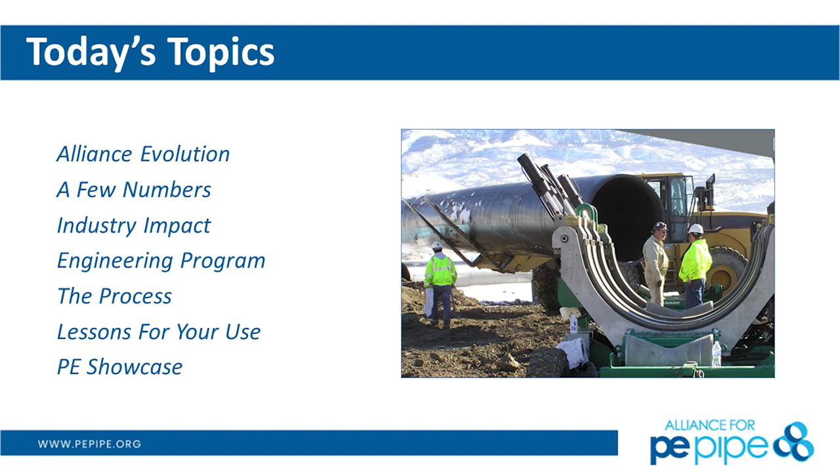And we have a board of directors that guide this organization. And who's in here besides Dave? Dave is now our board chair. I think he's the only one, right? So this is the group of people that my team reports to. We're very thankful for their service. We just lost Performance Pipe from the board. But yes, I'm disappointed, but they've been around since the beginning. They were in the room with Dave Hughes. And that's a lot of years of support. We can't do it without the support of these companies and their financial contributions. So it's a big deal.

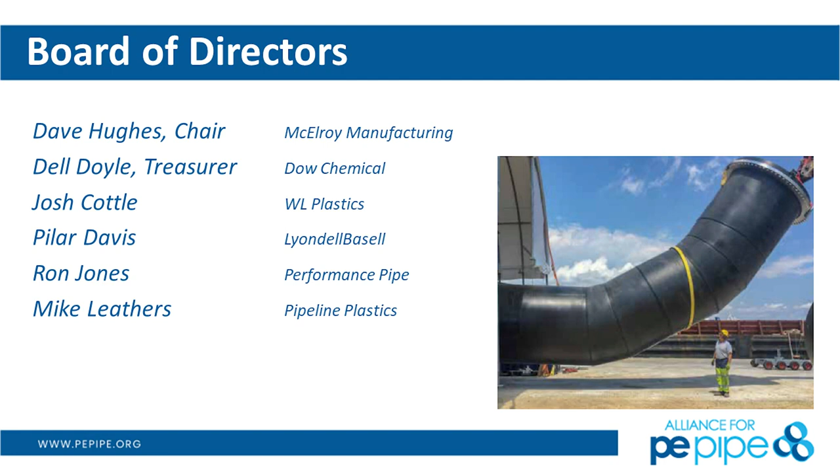So what do we do? We have a budget of about $1.4 million. We build cases. So we have over 425 cases. So if you're in Oklahoma and you want to know who in your peer group, if you're the utility, who in your peer group is doing it, you can go online and you can find out. We have a certified professional program. So we take a group of between 4 and 6 people a year and we educate them to a higher level so they can do their jobs better. This is a kind of an intense study program for a select group of people that want to participate.

We now have 45,000 names as of yesterday in our contact file. So these are consulting civil engineers and people in municipal government that operate water systems. This is a high maintenance thing. Who keeps a list? Who uses constant contact? How brutal are they? Every time you send out an email, they send you all the rejects, and if you don't take those off, then they won't let you start sending emails again. So this is something that we maintain on a regular basis.

We've got the engineering program, we've got cases and leads. Dan, what is a case and what is a lead?

Cases are general inquiries. If someone's having issues designing a pressure test, or looking at initiatives non-specific to an exact project, they want to know how to do something, but they're not actually tied to a project, or looking at a specific installation method down in the future. So it's a general inquiry for the most part.

The leads are important to what we're doing, so we share leads with the distributor community as we facilitate projects. We've got the podcast program.

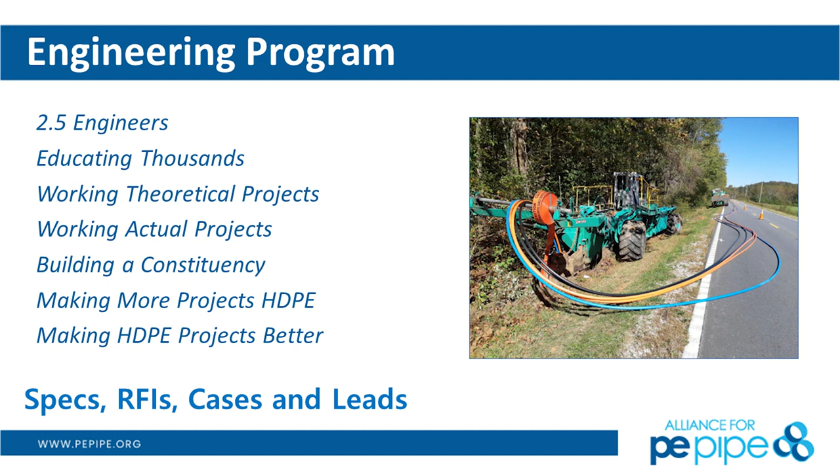I'm not picking on it, but I'm just saying Tulsa's a perfect example of what we see and why the Alliance is around, because it takes so long to get through people and get to the key stakeholder that's making the decision, or through the committee. And when you're at a committee level, you can add 2 or 3 years for sure, right? So we've built up our ability to communicate at that level with the various utilities.

So I call this the key metric table. Webinars, so we did 34 in the first year of COVID. That makes sense because we weren't able to go on the road, right? And now we're parked at about 15 webinars a year. And of those 15 that we're doing this year, 10 of them are new content and 5 of them are recycled content.

Road shows, we'll do 25. We've already done 25 this year. We'll end up about 28.

Trade shows, think AWWA or the Great Texas Water Show. This year we will do pipe bursting in our booth in 4 of those 6 shows. So those are big booths. That's a big footprint, very expensive.

And for years, I did the AWWA show, and I tried to be a speaker there, because I do speak a lot for this industry, right? And they always say no, no. Why? Well, it's because AWWA is run by the ductile iron people, and they don't want to hear about plastic. That's right. So now I break their pipe in my booth. And it really pisses them off.

So that's been a successful thing for us. We do it now at ASCE, which is a civil engineering show, and we've done it for the last couple of years, Bob, at APWA, right? APWA and always at AWWA, and it's always a huge hit. We get hundreds of people coming into our booth. Makes a lot of noise, and it's really cool to see. Yeah, breaking pipe is a fun thing to do.

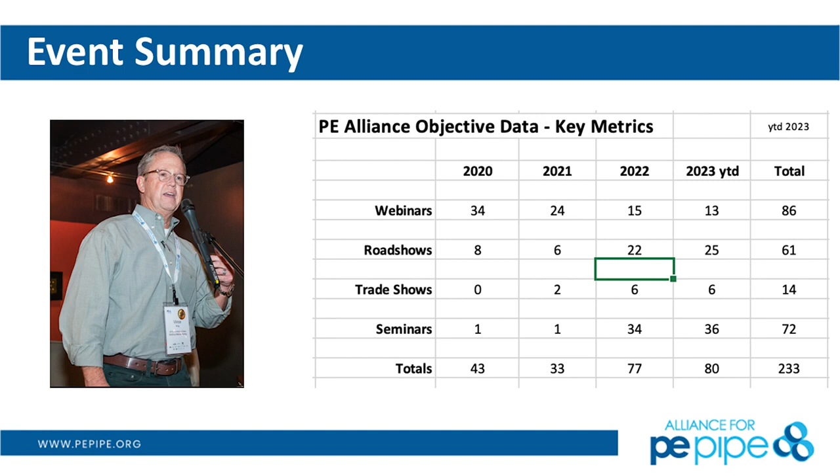We get around, and I've kept track of the industry members that participate with us. It's one thing to have the Alliance go, but we always partner with others. We typically, in any one year, will have anywhere between 80 and 100 of you all helping us produce all these events. So it's not just us - we might show up with the gear, but you guys are helping us produce the event.

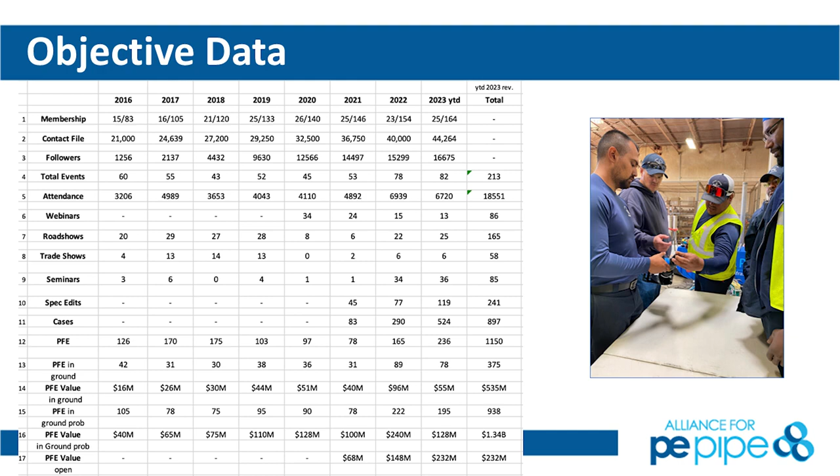And looking at our average attendance, pre-COVID we were 45, and now we're stuck the last 3 years at this sub 30 number. You might say, well, your webinars seem to be really, they're 10x more well attended than the road shows. But we really believe that the road shows remain critical to our mission.

And I think the reason the webinars are so successful is because we were originally known as this group that traveled the country with a truck with 10,000 pounds of gear on it, and we were credible, instead of just hiding behind a screen and people not really knowing who you are and what you do. So we have a presence, we are known, and just look at the average attendance.

We continue to get tremendous positive feedback on our webinars because of the content we provide. And let's go a little bit deeper into this - any questions on any of this?

Let's go a little deeper into some of this. Dave and his colleagues and Mike James, they've kind of pushed us into using a CRM. Who uses a CRM? I mean, how much do you hate that thing?

I tried it for a year and I gave up on it. Then when we started the engineering program, they said, well, here's the money, but you can't use it unless you have a CRM. I'm like, okay. Now I love this thing. As long as you take the time to love it, it'll love you back.

And it does. So this is cases from last week. We've had 524 cases this year. So that's an RFI or a spec. Example, hey, a hydrostatic test, how does it work? Closed means we've handled it. This guy had a question on burial depth, questions on electrofusion.

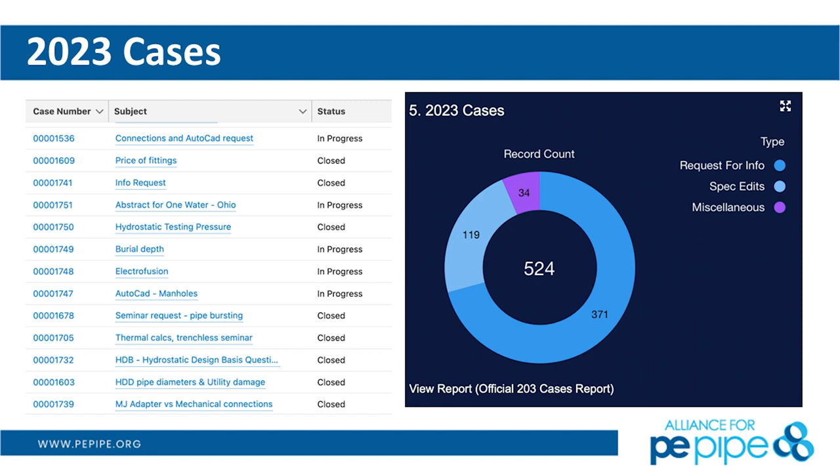You get the idea of what a case is. On PFEs, so these are the leads, 236 so far year to date. These are projects that actually have a budget associated with them. And this is a specific question - could be drawing set, questions about contractors, all kinds of stuff. But 70 of them are dead, 220 of them are open. Dan, what's the value of all the open PFEs approximately? It was 232 as of the end of Q2, so probably 250 million, roughly 250 million. Yeah, so we're averaging just under $1 million per PFE in polyethylene value.

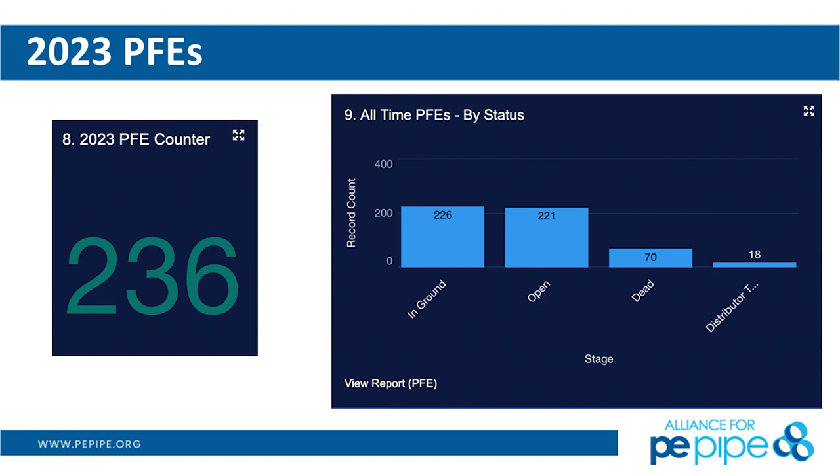So part of what I promised to do today was also to give some examples of some of the projects we worked on. Seattle Public Utilities, known as SPU, is a great example of a utility that McElroy was intimately involved with. I had an old 28 machine and an old 26, and Seattle invited me to come out and do a seminar with them. When I was done with the seminar, with the graciousness of McElroy, I'd left them a 28 and a 26, which they've had now for quite some time, and now we just moved the 26 machine to Woodinville. But anyway, they hadn't done any polyethylene except for a couple drills they had to do.

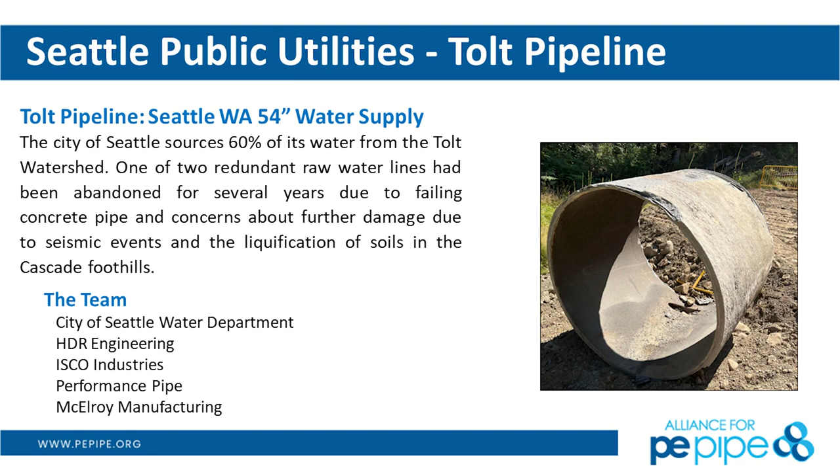Seattle has now done 4 water mains in hilly neighborhoods in downtown Seattle. And this Tolt pipeline is a project that Drew Mueller, who used to work for me, managed for ISCO, where the Tolt is a water body or a region where they take like 60% of Seattle's water from that part of the mountains. This was a failed concrete line that we ended up slip lining with some performance pipe, large diameter polyethylene. This project went in the ground last fall, so it's just about a year old.

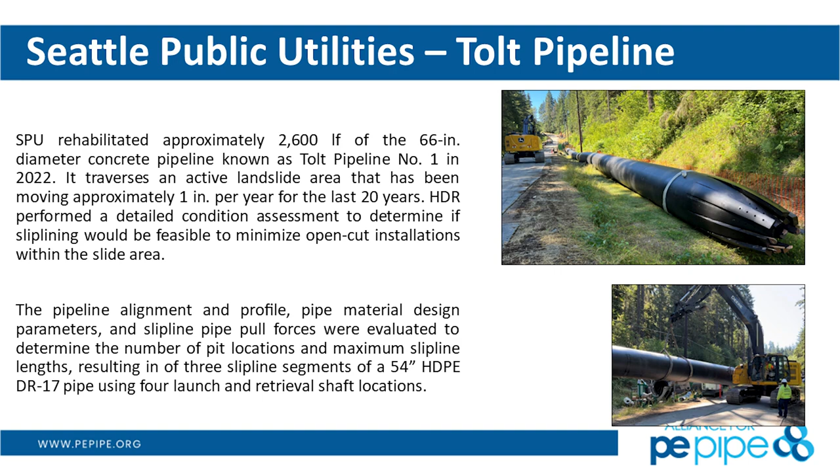So here's a situation where we taught the engineers for 2 or 3 years, didn't take any action. Then they did these 4 projects with water mains in downtown, and then they did the big one. They just got an award from the Alliance in the showcase of last year. Very exciting, perfect example of how the system works when it works.

Going back to the 4 major events that we do - trade shows, right? We only do 6 a year. Who do we see in those trade shows? Municipal staff and engineers and very few field guys. We get a few cases and a few leads, but importantly, people that are walking by the booth, they're looking. They're like, oh yeah, there's that polyethylene stuff I don't like. We do meet some people, we do get some leads.

Road shows - we call this discovery level, post-initial exposure. So you've heard about it or you went to a trade show. Here we see municipal staff, both field and senior management, and we get plenty of cases and leads, but importantly we're building our constituency and we're building cred because people actually get to meet us. Whereas trade shows, it's less of a personal event.

Webinars - we see municipal staff, we see engineers, hardly any field guys. Great for volumes and cases and leads, and we're building our constituency. Then the highest level of engagement we get is the seminar, but we also get the fewest number of leads. Here we're hardly getting any field guys - it's pretty much all engineers and some decision makers at the staff level. So based on what kind of event we choose to attend or produce, we get a certain kind of yield.

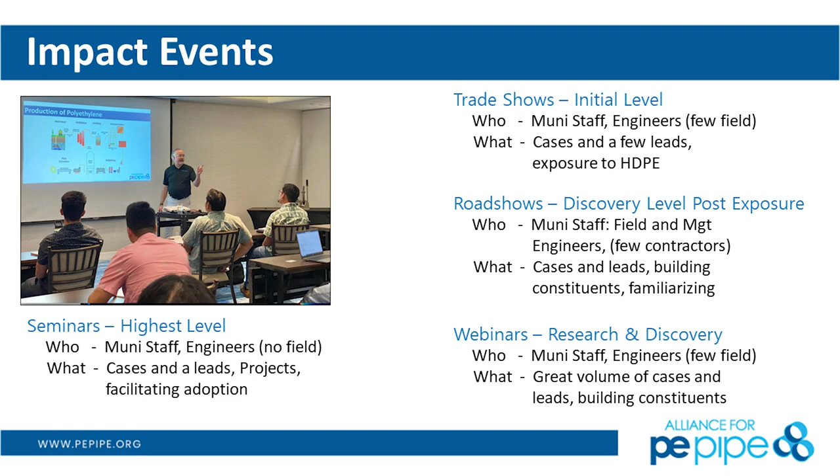Let's take a look at the trade shows. These are the 6 trade shows we do every year. When you're doing 80 events year to date, people come up with great ideas - you really ought to do this show. Okay, you got to fit it in.

One of the things I do at Showcase is announce what I'm going to do in the following year and get feedback, and I start working now on what's going to happen next year. So if you're interested in getting involved, now's the time.

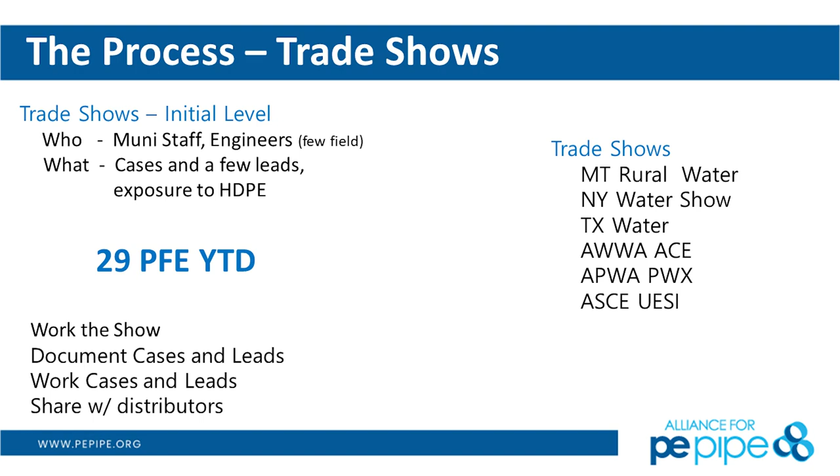Year to date, we've produced 29 leads out of the trade show program. Not terribly prolific, but those are all really pretty good leads. And what do we always do? We conduct the show, we document what we did, we work those cases and leads, and then we turn it over to a distributor.

We've produced 39 leads out of that. Actually, it's about 1 lead, a little more than 1 lead per seminar. Once again, we conduct the show, we document it, we work it, and then we give it to a distributor. Oftentimes that distributor, because they've attended about half of those, they already know about it.

The other interesting thing is just because we work with a distributor doesn't mean we get good information back, because we're working with their competitor too, and a lot of the sales guys don't trust us. Typically leadership does, but the sales guys and gals are like, really? You just did a show with ISCO, now you're doing one with Core and Main? And I'm supposed to trust you? So there's that we deal with.

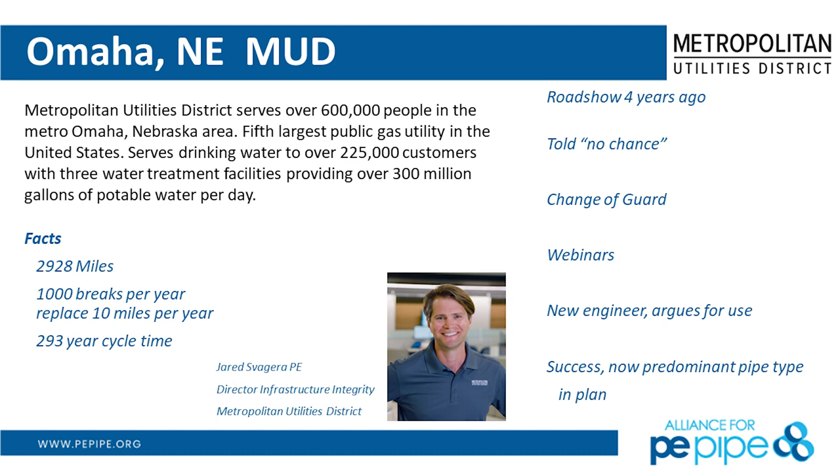So love that story. One of the questions we get a lot was, how do you handle these questions when you want to compare polyethylene to the other materials? So Dan and I put together - this is Dan Landy, my engineer, and Bob Hack runs the trade show program - so if you look at ductile iron, what are the key reasons that we argue that ductile is no longer the pipe? One of the things I'll say early on is it used to be the state of the art, certainly, and it was.

When polyethylene was commercialized in the 1960s, it was commercialized at about the same time both PVC and ductile iron were, right? Except we didn't pay any attention to the municipal water market, so it's no wonder we gave it to PVC and ductile. But anyway, it corrodes, it tuberculates, it leaks like hell towards the end of its life, and you have water quality issues. All I have to do is talk about Flint, Michigan, which I know a lot about. And it costs 2 to 3, maybe 4x what polyethylene does. Pre-COVID, polyethylene was more expensive than PVC and half the price of ductile. Now we are still the least expensive of the major 3, even though the gap between those two is closing.

And you show these images. Another thing I like to say about ductile iron is imagine if a guy came to you trying to sell pipe and he said, I've got this great product, it's called ductile iron, but I want you to coat the inside with cement and wrap the outside with polyethylene. But that's what Tulsa's doing. They're coating the inside with cement when they buy it from the manufacturer, and they're wrapping the outside in polyethylene.

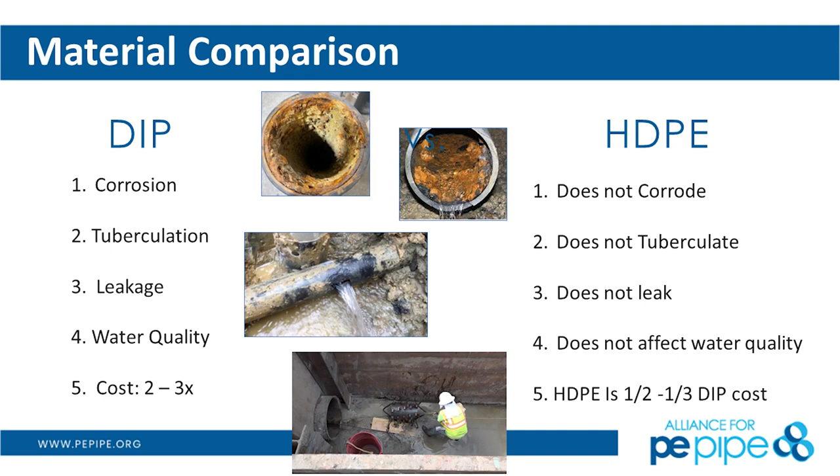That is how I talk about ductile iron. Ductile iron was a very good pipe in its time. We are still the best country in the world for water quality, even with our issues - 14% water loss on average. We're still better than most countries, except in Europe where they mostly use polyethylene.

Then when you look at PVC - and that's another thing I've learned since I've been doing this - when you look at the 9 major markets that polyethylene is in, PVC and ductile are really only in industrial and municipal. PVC is also in conduit. And polyethylene is in all of them - landfill, geothermal, mining, industrial, water, gas, conduit. I'm missing 2. That's really compelling. I have a slide on that in my 101.

So in the case of PVC, it suffers from cyclic fatigue. That means it's like a pitcher's arm - you've got so many throws in it, so many cycles in PVC. And when it cracks, like cast iron used to. All you have to do is look at the City of Calgary data to learn about that - the joint separates. That's the reason, as good as I like to think I am, the reason we got into Flint, Michigan isn't because we've got a great product. It's because PVC broke on a 2-mile line 16 times inside like 6 months from over-insertion.

It is brittle. In other words, if you hit it with a sledgehammer, it'll crack. This is what happens when you store it too long outside. And if you bend the heck out of it...

It doesn't do well. It gets its deflection in the bell and the spigot, whereas they measure their deflection in millimeters. We measure ours in feet, because our whole pipe bends. I mean, look at that bending radius.

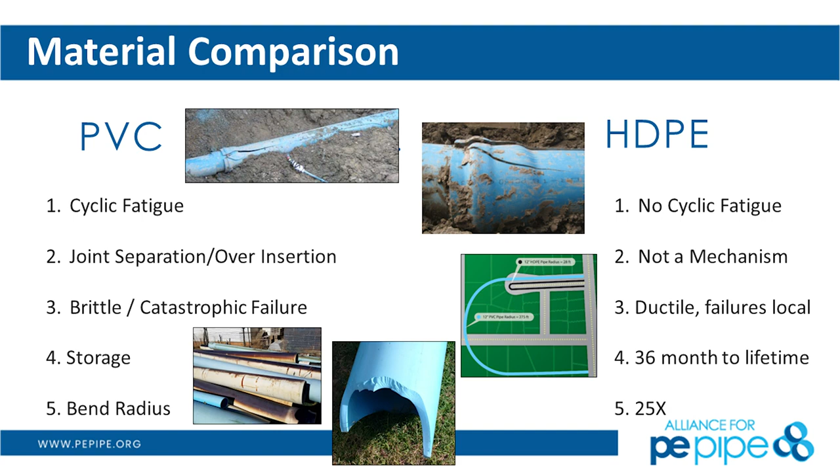So this is how I argue these points. This is a lesson learned from the Alliance. Dan, could you give us a couple minutes on the top 5 questions that we see in the engineering program? We're doing just fine on time.

Okay, great. It's probably a good quiz for everyone to make sure you understand these. If you don't, pay a little more attention or reach out to me. But I'm gonna give you guys some. Do you have a clicker? No, you just had it taken away for insulting your audience. There it is. All right, come on, let's go.

Okay, did you put the honorable mentions? So there are a few more. These are questions that are not necessarily most frequently asked by you guys, the distributors and manufacturers, but what people on the engineering side are most concerned about. So this isn't me saying these are the 10 most important issues. This is what the industry finds either most important or most misunderstood. I wanted to make that differentiation quickly.

Sorry, Harvey, I didn't know you were going to be here. I would have called the MJ adapter the Harvey adapter. Apologies in advance. So let's go through a couple of these.

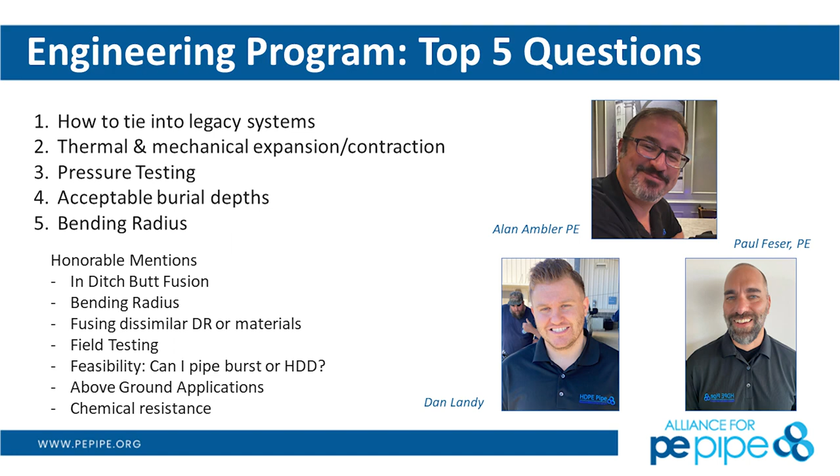I'm going to focus a little bit on how we help address these issues, hopefully making you guys more confident in using my services and bringing us in to help with jobs you're working on. I didn't know we were going to have a bunch of time, I thought you were going to give me my traditional 1/15 of your time.

But we have a video. This is the number one most watched video on YouTube. So when Peter talked about all those markets and every different installation method, one of the really nice things about the webinar is Peter said, hey, I want to develop more content for YouTube, I want it to be accessible. Well, we've basically just been recording every webinar for three years and cutting them up into different sections.

So if you guys have an engineer looking at open cut, HDD, slip lining, compression fit, any installation method, you can send them an hour-and-a-half video and say, hey, take a look at this, let me know what you think, give me some of your thoughts. But still, after all that, the number one video is connecting PVC using an MJ adapter.

I like to think of this video as a bunch of high school kids sneaking out and their car breaks down. Everyone's done it, like three times, I don't know about you guys. You catch yourself on YouTube watching how to change a spare tire. I like to think the guys in the trench are trying to figure out, based on these YouTube videos, what to do in the field. So if you guys have any recommendations for more to add to our series, we're looking forward to it.

The legacy system, there's a ton of questions that come with this. People want to know, hey, can I fuse to the existing pipe in the ground? If that's PE 3408 or 4710, that pipe's going to be able to fuse to each other, it's the same exact melt index. However, there are some older generation polyethylenes. We were asked by Boeing to come visit them at ISCO.

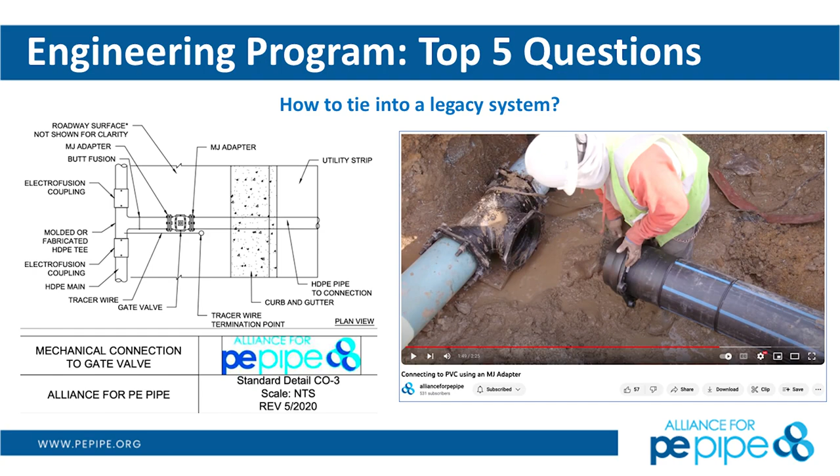So, thermal expansion and contraction. The reason I think this is the most commonly asked question is Peter talks about the ductile and PVC guys. I think they're knocking us, telling their contractors, hey, this is an issue. And is it an issue? I guess if you don't know about it and you encounter thermal expansion and contraction, it is an issue. So we just kind of like to get ahead and educate people to make sure they're using it for their best practices.

When we talk about thermal expansion and contraction, I've actually broadened it for this question. We have a really nice equation, 1 inch per 10 degrees per 100 feet. Keep in mind, that assumes two different things. One, it assumes an instantaneous change in temperature, so that's if it's 100 degrees out, you're assuming that pipe's 120 degrees, and that at night it's going to go down to 40. That's assuming a flash, like from A to B. That's not really how it happens, so typically you're only going to see about half of that observed value.

But something else that's come to my attention is the mechanical strain, especially on your horizontal directional drills. I love horizontal directional drilling, particularly because every other pipe type can't even get in. We're putting so much stress and strain on that pipe. So there are ways to calculate the mechanical strain on the pipe itself. My recommendation is put 1 extra stick on that fusion so you don't have to really worry about nailing down the exact amount of feet that you're going to pull into place.

A really good rule of thumb, if you ever have a contractor ask you a question about this: if you're drilling 300 feet, put an extra stick in there, make it 350. Another good rule of thumb: allow that pipe to relax for the same amount of time it was held under tension. So if it took you guys 4 hours to pull that pipe into place, give it 4 hours afterwards before you start even thinking about your final tie-in connections. Either way, you shouldn't be doing any tie-ins due to the thermal effects when you're pulling the pipe into the ground until the next day. Just understand there are mechanical and thermal effects on both.

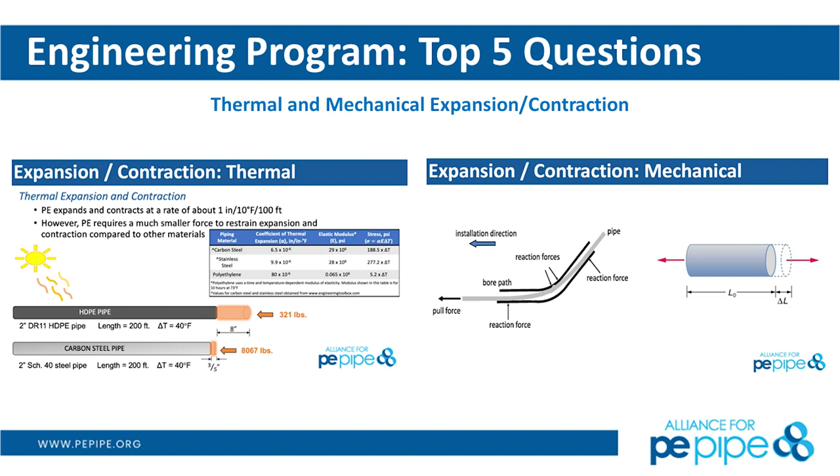We put together a series of videos recently on pressure testing. Pressure testing is what I consider one of the main novelties of HDPE. So if anyone's not familiar with pressure testing, I like to think of our pipe as a heart. Every time it gets pressurized or energized, it just swells a little bit, right? Just like a heartbeat wants to allow for that, so we are creating a little bit more room in the pipe itself.

As part of that process, we have to provide makeup water. And contractors, let's be honest, don't want to be sent the PPI handbook on what a pressure test looks like. They probably already understand it, but they don't want you just sending them a technical resource. You guys are distributors, you're pipe manufacturers. They're calling you because they want the quick fix, the quick answer, and they want your recommendations. So we put a bunch of videos together that really highlight that difference.

I've been making a huge push to include the data logger, thanks to Steve Bredemeyer and Dave Mosier helping us put that on this summer. We have some really good videos on incorporating that. For anyone not familiar with the data logger, you have the main line connection on your pressure test, it gets you up to pressure, you provide makeup water, and there's a third connection, which is a pressure transducer. So your data logger is essentially telling you what your pressure was for that entire 4 or 5 hour test.

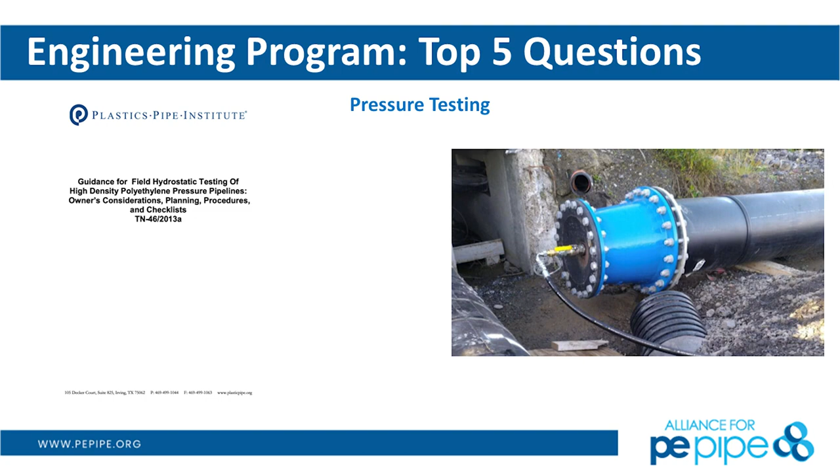This isn't a guy, the low guy on the totem pole, sitting there with a notepad anymore saying 1152, 214 PSI. Anyone can tell you fake data like that - it's like a high school kid cheating on his lab report, he's just telling you what happened, and he has absolutely no idea, let's be honest. Acceptable burial depths - this is extremely common in the gas industry, working with your burial depths.

So if anyone here is in the gas market, don't think everyone in the municipal water market understands it as well as you. Typically I'm borrowing from our pipe manufacturers, the gas guys, because they're so used to answering this question. But proper burial depths are important for a whole lot of reasons.

We are worried about this compaction, or the haunch zone. One of the things with polyethylene is we get away with really narrow trenches, and we don't put people in the hole. So what contractors like to think is, if I have a 12-inch pipe, I'm going to make a 14-inch excavation because I don't have to put anyone down there, no issues at all. While there still are going to be limitations on the open design and burial, it's considered a flexible pipe, so we do want to make sure we're getting the proper compaction and backfill in those haunch zones.

So although with polyethylene we're getting contractors so familiar and confident using it, we've got to make sure they're not getting too confident and too familiar, because there are certain situations that do arise, and the acceptable burial depths is what I personally think highlights the difference.

AWWA came out with their second edition of the M55 manual during COVID, and they took this equation out - but it's such a great equation, they just made it a little bit more complicated. But if anyone here isn't aware of this design manual, they basically tell you all DR is 7 to 21. So unless you're getting a temporary bypass or some mining applications where you're just using produced water, DR 7 to 21 in the municipal setting is going to be more than 95% of your projects.

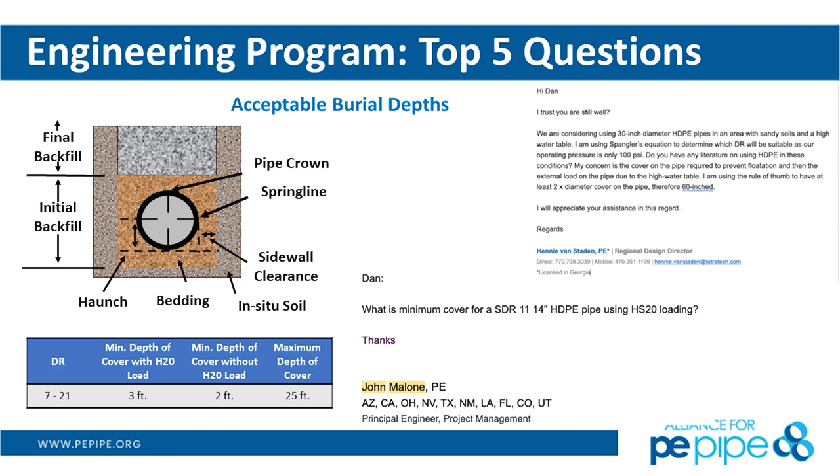This is just an example of a project where the regional director for Tetra Tech - it's not just low-level engineers having these questions. This is everybody throughout the process.

Peter touched a lot on bending radius. The one thing I do want to call your attention to, maybe two different things - if you guys have fitting or flanges, even though HDPE is super bendable, at the end of the day we do still have to go up to 100 times the pipe OD. And the reason being, you don't want to have any type of stress on an electrofusion or mechanical connection that's going to bend the pipe and possibly give it a stress riser.

Now when you're teaching your customers this, it is worth noting this is the theoretical maximum before you're going to damage the pipe. So whether you call it a minimum or maximum, I like to think of it as a maximum. But HDPE pipe is very similar to just holding a spring - you can take a spring and bend it, but that spring just wants to go right back to its form when you let go of one side. So even though we are promoting the bending, understand that pipe has a whole bunch of stored energy in there. Making sure your contractor is handling it safely is a real concern when using polyethylene - that pipe wants to behave very similarly to a spring when you start bending it.

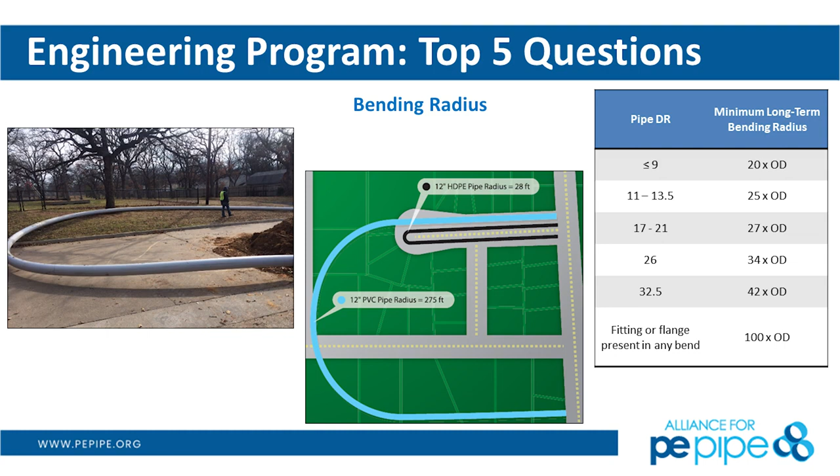Is that all I got? Way to go, thank you. All right, introduce your new colleague.

Oh yeah, and Paul Fetzer. Paul's a longtime civil engineer - you want to tell us a little bit about yourself? Yeah, Paul Fetzer, 23 years in the civil engineering industry. I've spent a lot of time with ductile iron, PVC, concrete, and the least amount has been HDPE, but hopefully that'll change in the future. All right, we're happy to have you.

So here, back to our CRM, which we use Salesforce - the webinars are the most productive with leads, road shows, seminars, and trade shows. So we're paying attention to this in our weekly meetings. One of the big lessons here is events drive discussion, they drive the leads and the cases for sure. And the critical step for us is to turn these things as quickly as we can over to distribution, so it gets it off our plate and we get on to working on other stuff, because we always have a backlog.

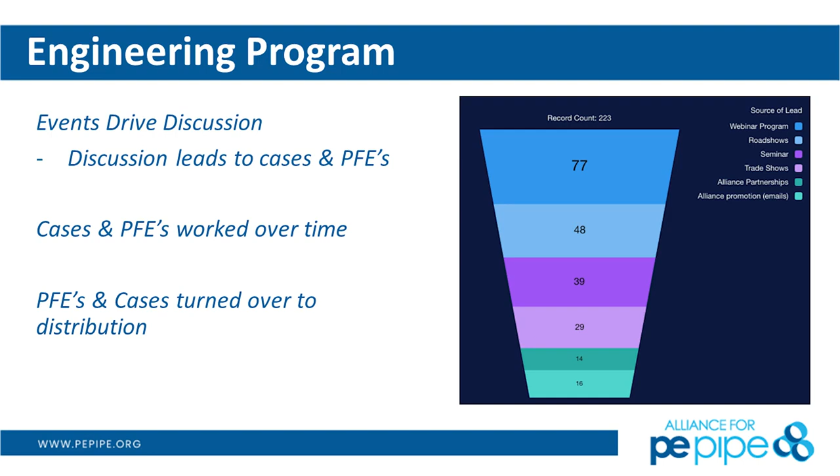Another one I like to talk about, just started, is with our friends at Consolidated in Huntsville, Alabama. This utility met us at a Consolidated road show we did in Birmingham. That's what I love about Consolidated, taking it to the heart of ductile iron, which is Birmingham. We did this show, met this guy, then saw him at a trade show, and he said he really wanted us to come to Huntsville and do a road show. We couldn't fit him in last year, so we finally went this year.

They have 1,100 total miles in their system, with 440 miles of cast iron, but they're only doing a quarter mile of replacement a year. This guy looked at me and said, what do we do? I said, well, you've got to do pipe bursting. That's the only way you're going to get through all that cast iron, because right now it's starting to fail at a higher rate. They have 3 crews that do nothing but fix pipe, so they're looking for a way. But he's the engineer, and he's like, we've got to get these field guys on board. That's what we did with Consolidated last month.

We totally focused on these guys, spent time doing fusions with them, talked through the theoretical side of it. Who knows where it's going to end up? We're early in this cycle, right? We don't know if we're going to have success, but I'm just sharing with you that these things are occurring all the time.

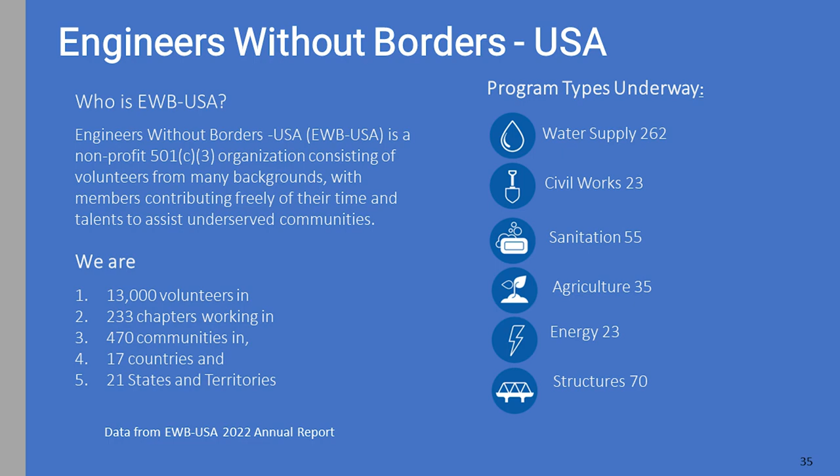He sent roughly $2 million of pipe to a few different jobs in Africa, and I always butcher the name, Bob. What is Congo's official name? Democratic Republic of Congo. Okay, I called it the Dominican Republic, and Bob won't let me live it down. I called it the Dominican Republic of the Congo. I can't make that mistake again. Okay, so you guys heard it from me.

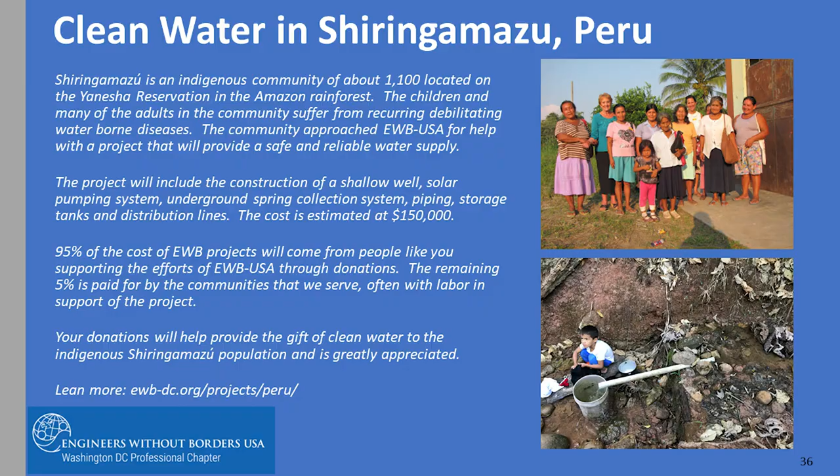DRC. So they sent a bunch of pipe down there, and civil unrest broke out. There was a bunch of conflict, and they let the pipe sit for about 1.5 years. They cut samples, sent it back to the U.S. for testing, and deemed it unsuitable for water use. So he, as an engineer with Engineers Without Borders, has unofficially agreed with his partners to start using HDPE full-time for that indefinite outdoor service life. An interesting way of why he really started focusing and learning about HDPE, but that's how we've come into contact.

We've got some generous donations already from our member companies, including McElroy, and I believe WL Plastics is providing some coils as well, and ISCO. See, this is your project. Don just likes me. Now we're asking all our webinar audience for money. I don't know if it's working, but we are giving back. We are going to conduct this a year from now - at least 5 people are going to go down to help install this for a week.

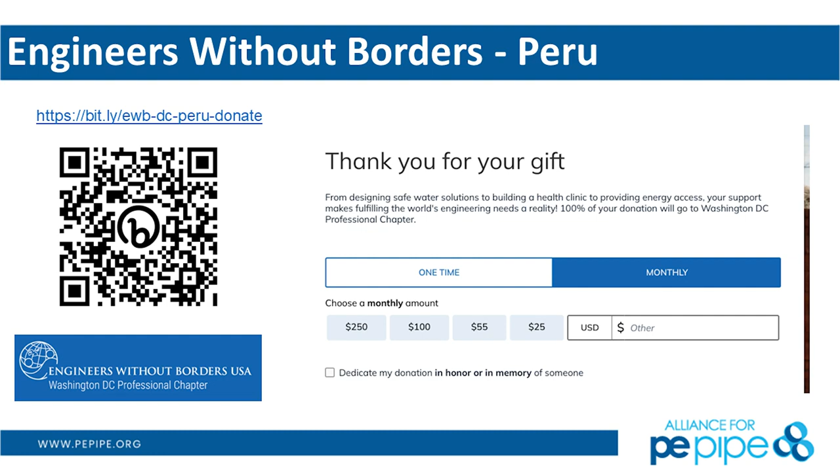Very excited about it. Now we come to Flint. Flint, as you know, 8 years ago had a tremendous problem. They poisoned their community, thousands of people got lead poisoning. They switched water sources, and the water treatment people weren't paying attention. The increase in tuberculation in the system caused there to be no residual chlorine in the system for over a week, right? That's a bad thing - you wouldn't want to be drinking water that had no residual chlorine in it.

So we go there, we participate, and basically all we got after 3 years worth of work was one drill that probably would have gone polyethylene anyway. Then COVID comes. This guy named Mark Adis, the engineer that I took to lunch a couple times, started showing up, and this is what happened. Let's see if we can get it.

So we're in Flint, Michigan today with Mark and his consulting civil engineers, as well as several contractors, to talk about HDPE pipe. Mark, tell us, where did you start on this polyethylene journey, and where are you today? Well, we started out not wanting it, and now we're looking at it very seriously.

Been convinced with all your webinars and that, and I've seen the light, I guess. Well, you're right. I mean, 5 years ago, you and I spent some time together here, and polyethylene wasn't high on the list here in Flint. But so what changed, Mark? What changed your opinion? Tell us a little bit about that process.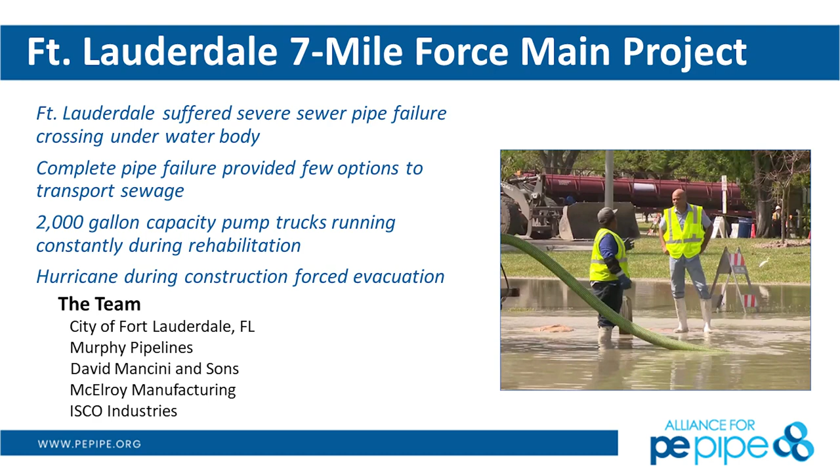So Brian Fletcher and I did a road show pre-COVID and pre-big disaster in Fort Lauderdale. Fort Lauderdale had their main sewage line fail in the Intracoastal Waterway. Who knows what the Intracoastal Waterway is? It's a big deal, right? Now it's full of sewage in Fort Lauderdale. What do they do? Well, 4 engineers had been at this road show, so they'd heard about polyethylene. They contact Camille at PPI, ISCO, and Murphy Pipeline because they knew about polyethylene. $65 million later, their trunk line was solved.

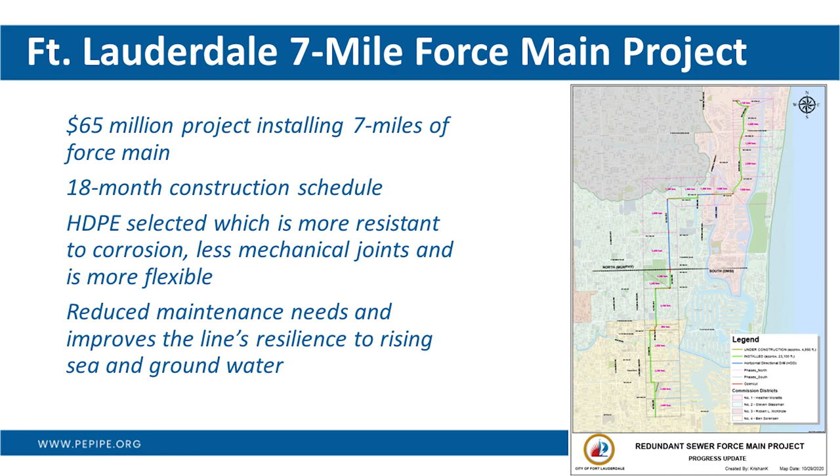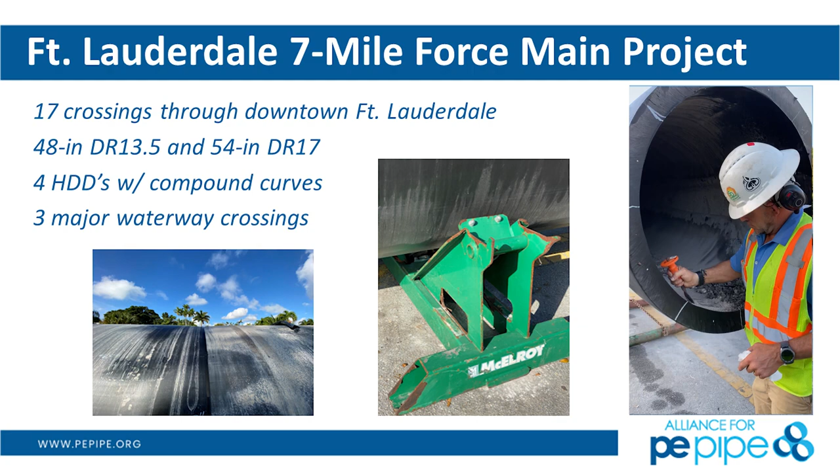We're out of time. Okay, well, we're almost out of time. So take a look at this cool stuff that happened on this project. Here we have Mr. C cleaning the inside of pipe, McElroy rollers. Anybody want to talk about toe-in? Yeah, we see it here on 54-inch diameter pipe. We'll bypass this video.

And then yesterday on my feed, what do I get because I follow the city of Fort Lauderdale? I get this video produced by the city of Fort Lauderdale on their polyethylene project, which was totally different. So at a road show last month, they said, oh yeah, polyethylene's in our capital program. We're pretty much not using anything else for water, right? And now they're producing their own videos saying, hey, we're sorry, Mr. Business and Mr. and Mrs. So-and-so living on the main street. We're using polyethylene, but we're going to be in and out quickly. So now we've got a utility, after all of that, $65 million, we solved their problem. Now they're producing videos on how great the product is. We're going to get Tulsa eventually.